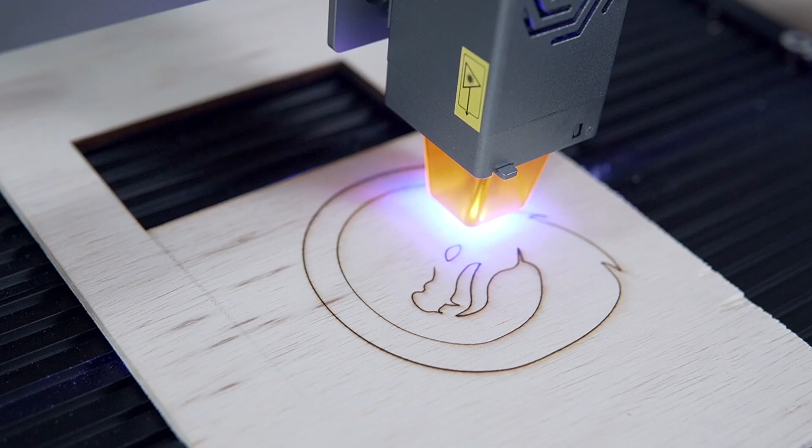For those starting out on their laser journey, this video will give you a high-level overview of LightBurn and the tools available to you, from setting up your USB-connected laser, using a few common tools, and finally cutting out a keychain as your first project. We will be building off of this in future videos, and will also have links in the description for more info.

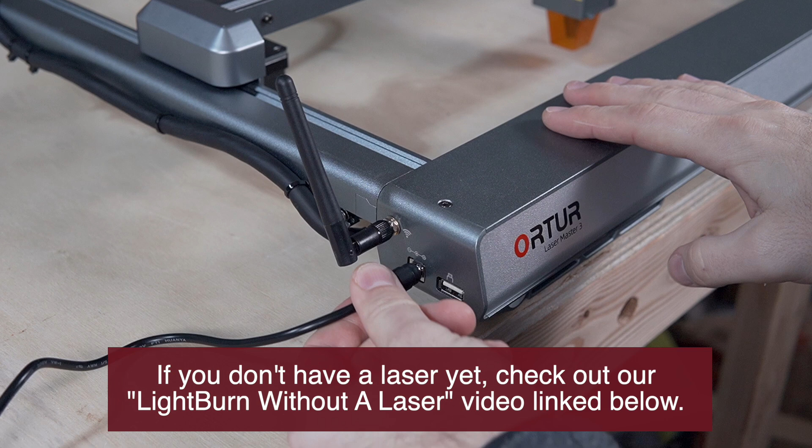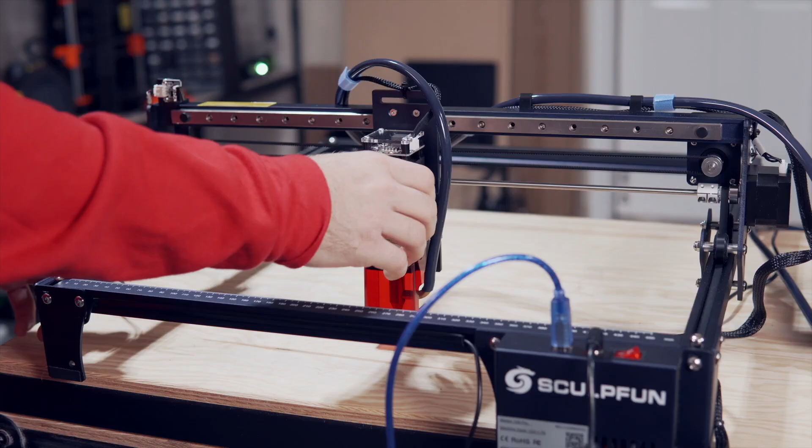The first time you open LightBurn, you will need to create a profile for your laser. Ensure that your laser is powered on and plugged into your computer over USB. Choose Find My Laser. This will scan for your connected machine and import settings from the laser. Many lasers will require a driver, so if your laser is not detected, you may need to get that from the manufacturer.

We have videos on the setup of some of these lasers in our playlist linked below. Enter a name for your laser, and if your machine has limit switches, enable Auto Home Laser on startup. Click Finish to finalize device creation and OK to close out of the device window.

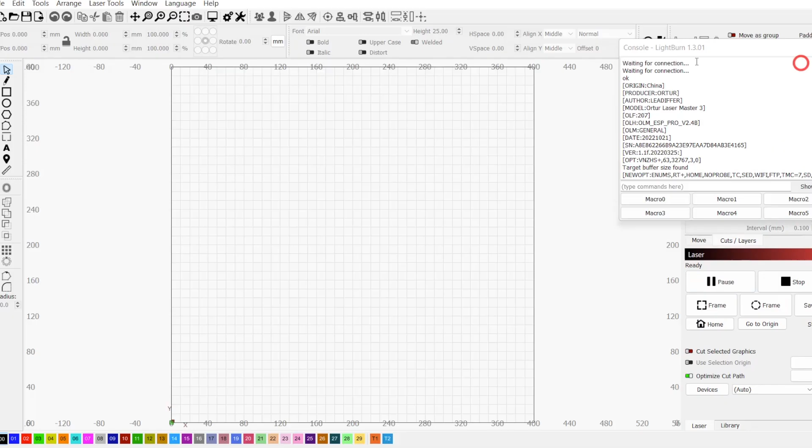In the laser window on the right side, we can see our laser status shows connected and the laser is ready. LightBurn uses a combination of windows, tabs, and toolbars for its various tools and functions. Many of these can easily be moved or reordered to what works best for you. If something goes missing or you don't like a change you made, open the window menu and click Reset to Default Layout, and that will put everything back in its original place.

In the left toolbar, we have a few tools that can be used to create shapes. For our keychain, select the rectangle tool, then click in your workspace and drag to create your first shape. With our rectangle placed, click the Escape key on your keyboard once to switch to the Selection tool. With this, we can click and drag the handles around our shape to resize it, or click and drag the center handle to move the shape in our workspace.

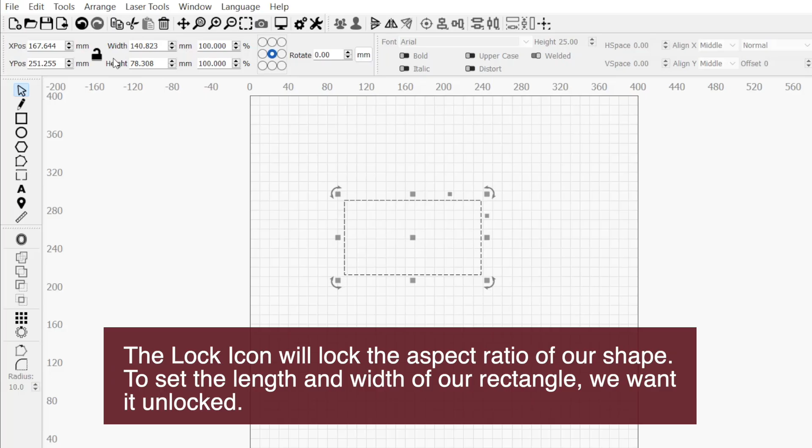The width and height text box in the top toolbar will show the shape's current size, and you can set specific values from there as well. For my keychain, I went with a width of 100mm and a height of 50mm.

Our keychain needs a hole for the keyring. For this, select the ellipse tool beneath the rectangle tool. While holding down the Shift key, click and drag in your workspace to create a circle. Holding the Shift key will ensure it is a perfect circle. Just like with the rectangle, we can use the handles to resize our circle. 5mm in size should be plenty for most keyrings.

Drag the circle to any of the corners of the rectangle, leaving a gap roughly the size of your circle from the edge. You may have noticed after placing your rectangle that a layer appeared in the Cuts and Layers window. Any design created or placed in your workspace will have a color layer assigned to it that tells LightBurn what you would like done with that layer.

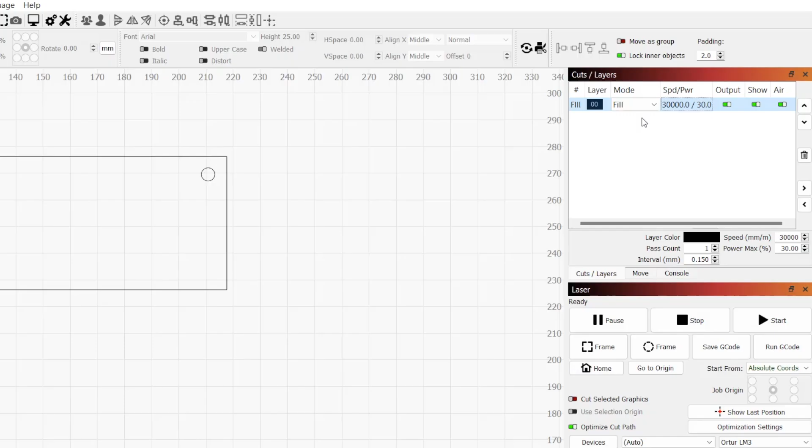Currently, it is telling us that our design is on the black color layer in fill mode with a speed of 30,000 millimeters per minute and a power of 30%. We can assign any color to our design using the color palette in the bottom toolbar. This will come in very handy for complex projects. Fill mode will completely fill in any closed shape on this layer.

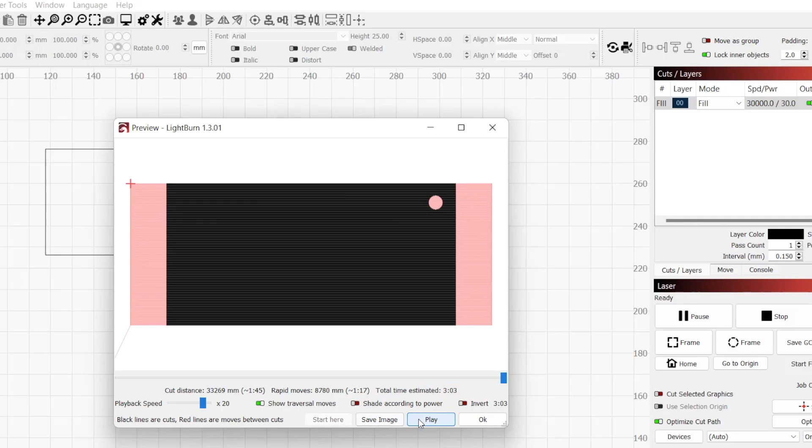If we go up to the preview button in the top toolbar, we can see a simulation of the current settings. We do not want our keychain filled in, and instead we want it cut out.

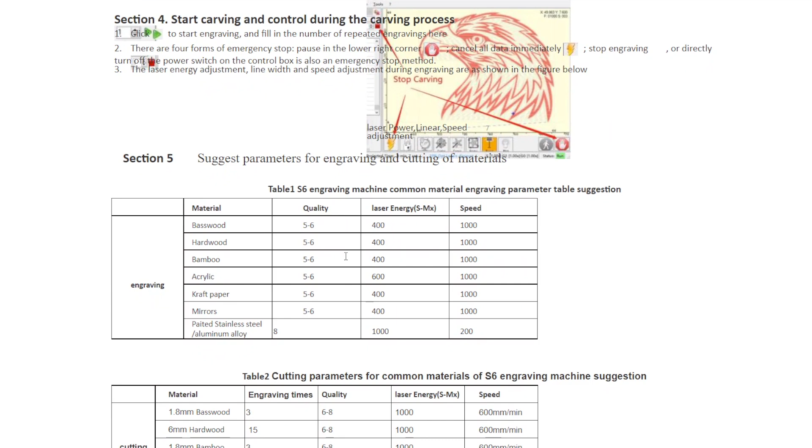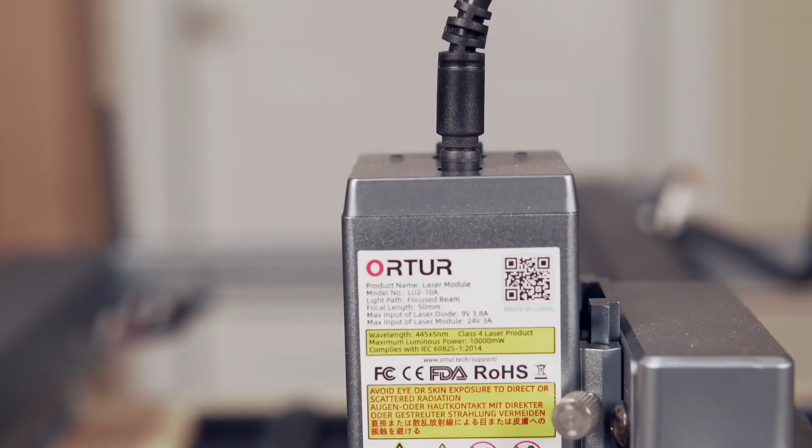Many manufacturers will provide a table of recommended settings, which is a great place to start. In later videos, we will show you how to use LightBurn's test tools to help find the best settings for your projects. I'm using the 10W Ortur LaserMaster 3 diode laser with 5mm thick wood, and a speed of 300mm per minute with a power of 100% is recommended.

We can change the speed and power settings using the quick settings boxes in the bottom of the Cuts and Layers window. All that our keychain is missing is some text.

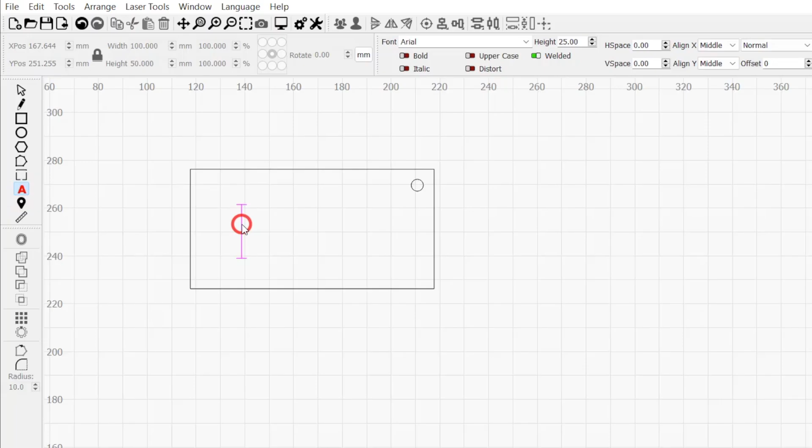Click on the A icon in the left toolbar to activate the text tool and click in the keychain to place the text cursor. Here you can type anything you would like on your keychain. I went with First Laser Project, but feel free to be as creative as you would like.

The top toolbar will give you lots of options to customize the font, size, and spacing of your text. The main consideration is that the text fits inside of the rectangle.

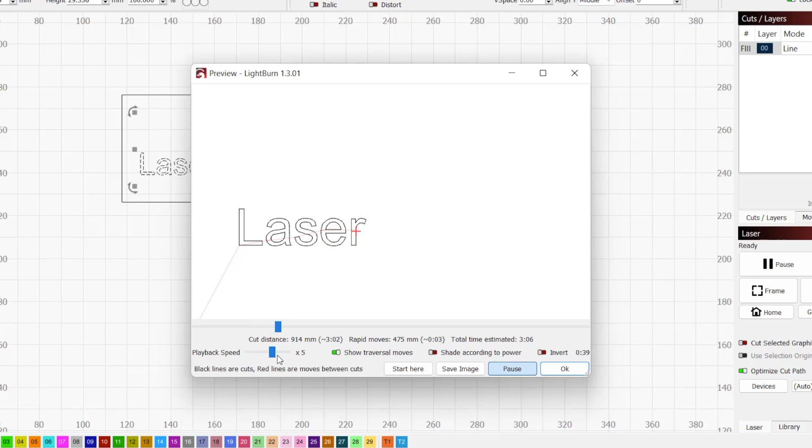Currently, our text is on the same layer as our keychain body, meaning it will be cut out, but we want the text to be engraved. With the text selected, pick any other color in the color palette to assign the text to that layer.

For our text, we will change the mode to fill. For the speed and power, Ortur recommends 15,000 millimeters per minute and a power of 10% for basswood engraving, so I will start there.

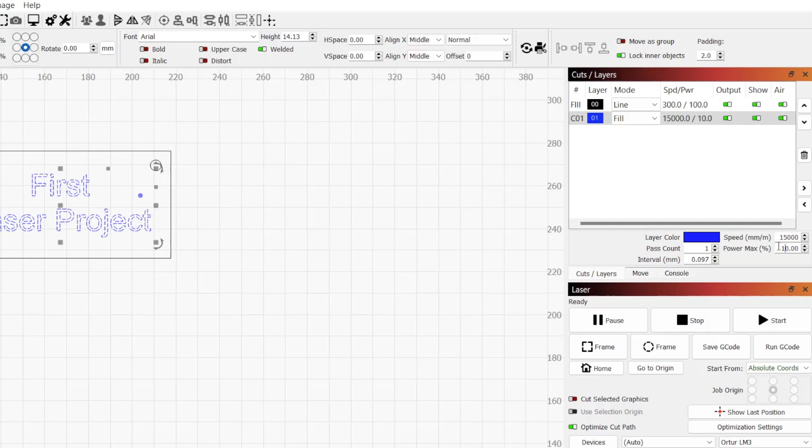The default settings in LightBurn will run each layer in the Cuts and Layers window from top to bottom. Generally, you want the outermost cut to be last to prevent your parts from shifting around. So we will click and drag our fill layer on top of our cut layer.

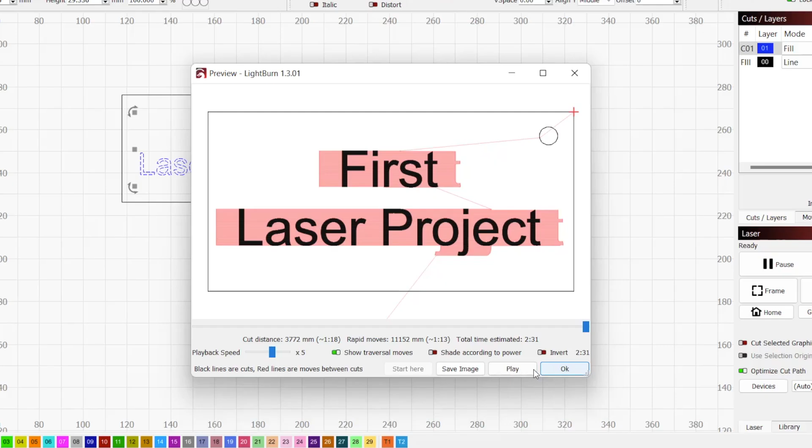Back in the preview window, we see our text is engraved first, followed by our keychain being cut out, which is perfect. You should always check the preview window before running a job to make sure that the expected output matches what you are seeing. We don't want to be wasting material if we can avoid it.

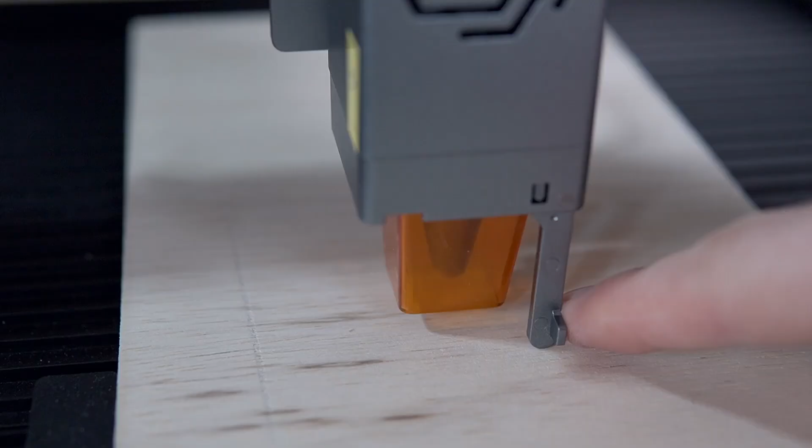On the laser, place your material down and set the correct focal distance from the laser to the top of your material. In LightBurn, we will be using the absolute coordinates mode for this project. Click on the frame button in the laser window to have the laser travel the bounds of where it will be running your keychain job.

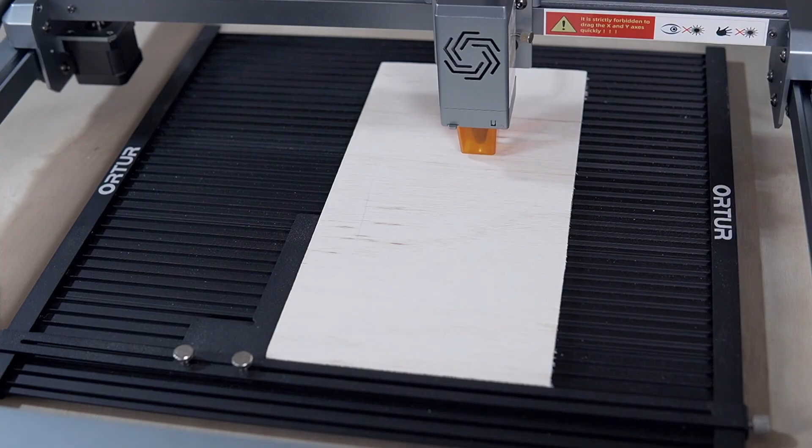Once you verify that the material is underneath the laser for the entire framing, click Start to begin running the job. The entire job should be no more than a couple of minutes, and if all goes well, you will have successfully engraved and cut out a keychain.

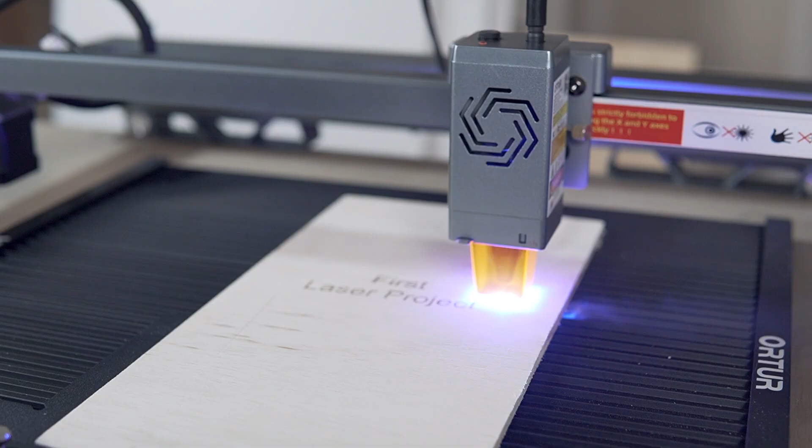If the material did not cut through completely, or the engraving is too light or too dark, you can adjust the speed and power settings, then rerun the job until you're happy with the results.

This is a big first step in your laser journey. You should now have a general understanding of the workflow in LightBurn. We will be covering the topics outlined in this video in much further detail in future videos.